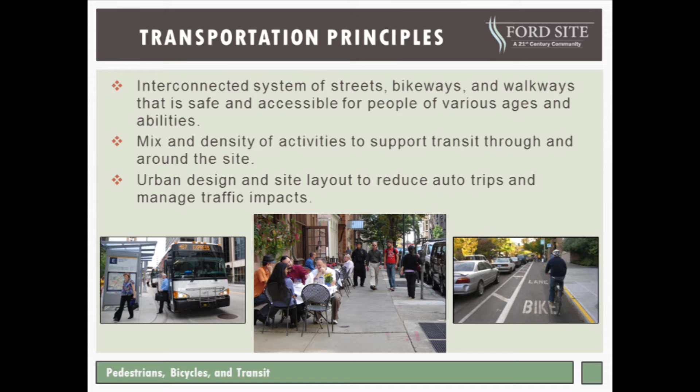So tonight's meeting, we'll start to talk about the role that bicycling, pedestrian, and transit infrastructure plays in helping do that. At the next meeting, we'll talk about it as well when we focus on streets, traffic, and parking. So we aren't discussing cars tonight.

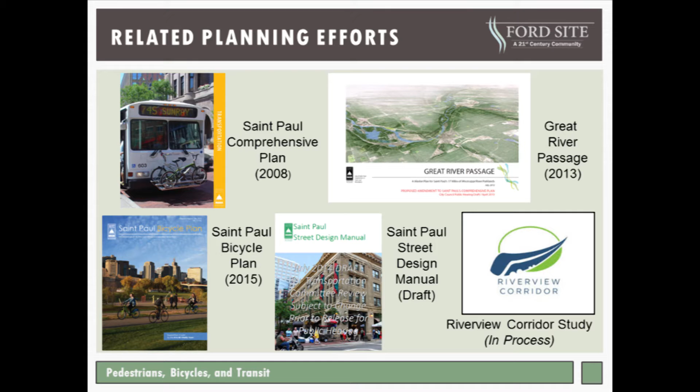There's a table tonight specifically on the Riverview Corridor study that the Ramsey County Regional Rail folks are hosting. It's out in the lobby room, so be sure to stop by and learn about what's happening with the study, since it relates so much to this site.

So where are we in the process of the Ford work? We started in 2007. Some of you might have been with us then, where we put together ideas and key principles. We evaluated them, refined them, and had a number of studies to help us do that.

We're now at the point of having identified some priorities, like our principles, and then questions we have - what do we still need to figure out? At these meetings we're identifying those priorities and asking questions, with your input helping us figure out decisions that will enable us to refine those priorities, and then put together a zoning and public realm plan that would be adopted by the city early next year. That will begin to set the stage for redevelopment, beginning optimistically in 2018.

The purpose of this meeting and our other topic meetings is to share information, give background on the topic, identify often difficult choices and trade-offs we need to make for the site, clarify expectations of what's realistic for us to hope for and achieve, and then get your input on these priorities and questions. We'll use that to refine the priorities, which again will go into the zoning and public realm plan, a way for us to implement those priorities.

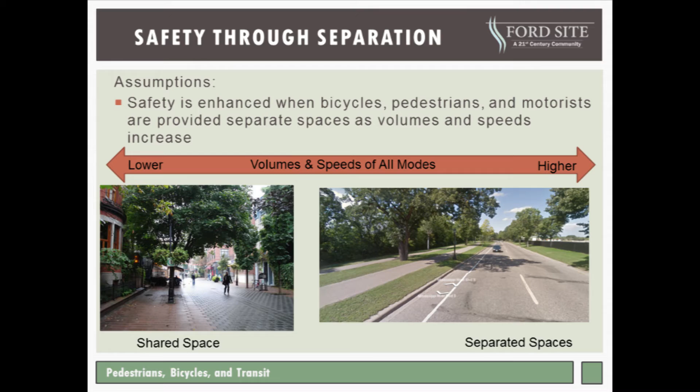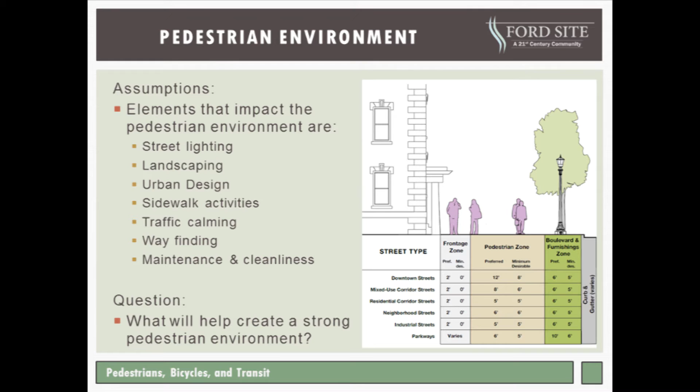This is an example of a typical sidewalk, which we can split into what's called a frontage zone - the area right up against the building, where the friction between pedestrians on the sidewalk and the building causes pedestrians to slow down. This is where you might stop and look through windows and window shop at a local business, or kneel down to tie your shoe. The behavior we often see is that pedestrians will hug up to the building to do something like that.

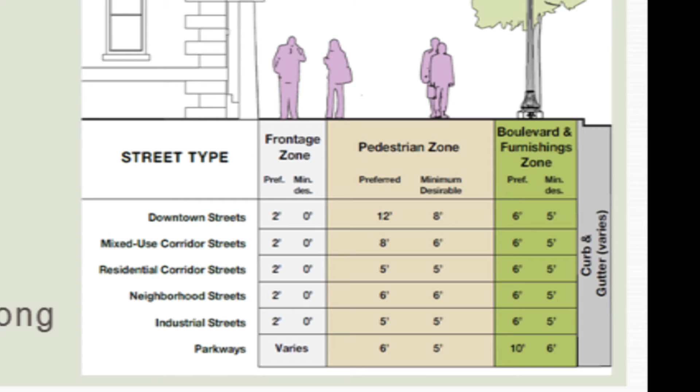Next we have a pedestrian zone, which is where the movement of pedestrians on the sidewalk happens. Then there's a boulevard and furnishing zone where trees, street lights, benches, or other street furniture would go. This is another example of providing separate spaces for separate types of uses so that we can keep sidewalks clear.

An important question we want to ask tonight is, what should the pedestrian environment look like, and what types of uses would we like to see on sidewalks? Should we be prioritizing space for things like sidewalk cafes within the Ford site? What are the characteristics of a sidewalk that will help make it a strong environment?

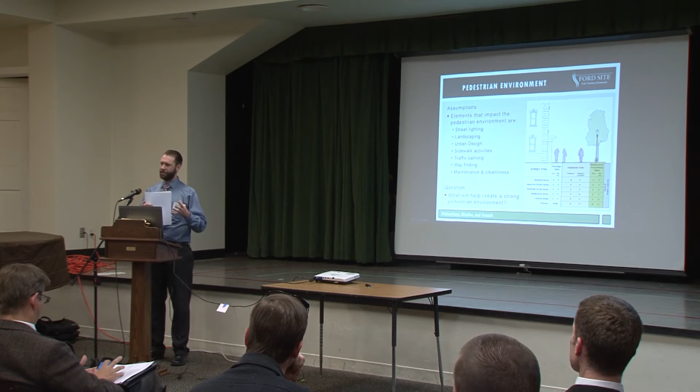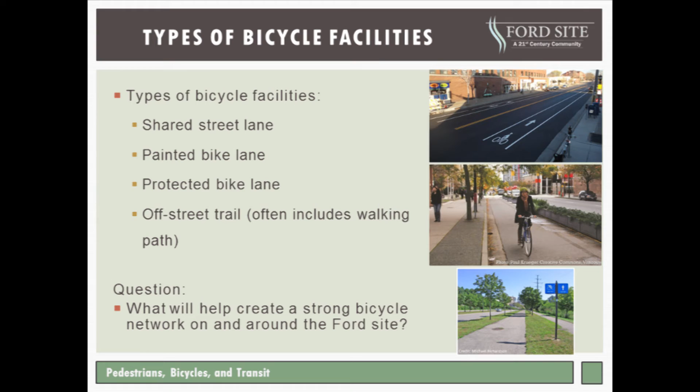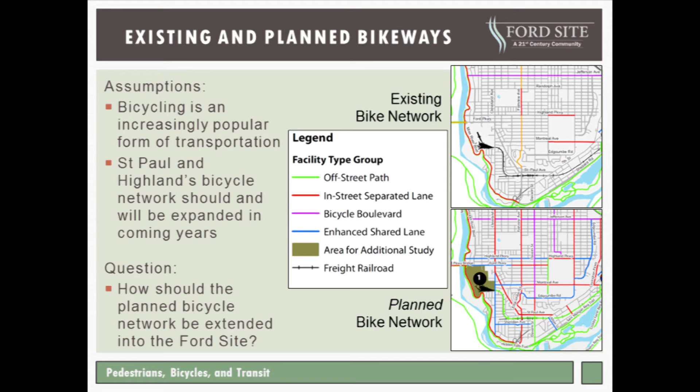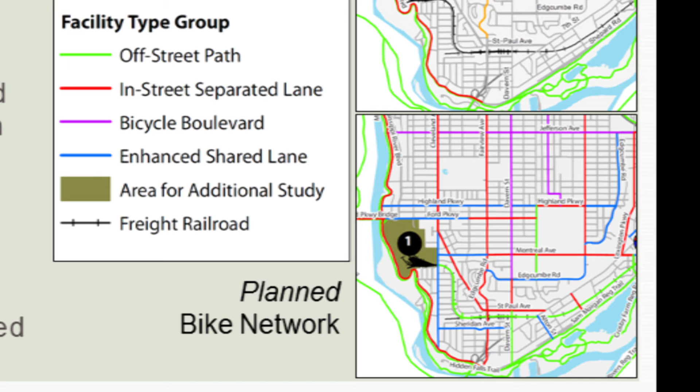Clearly there are a lot more lines on the picture on the bottom, which is the planned network. This is a vision set forth in the St. Paul Bicycle Plan of what bicycle facilities we should expect around the Ford site. The bicycle plan doesn't lay out a network of facilities within the Ford site itself - it identifies the Ford site as an area for additional study, and that additional study is happening now.

The bicycle plan gives us some indication of how people riding bicycles may be approaching or getting to the Ford site. The question for us tonight is how should those bikeways be extended into and throughout the Ford site? How will people get around the Ford site on a bicycle?

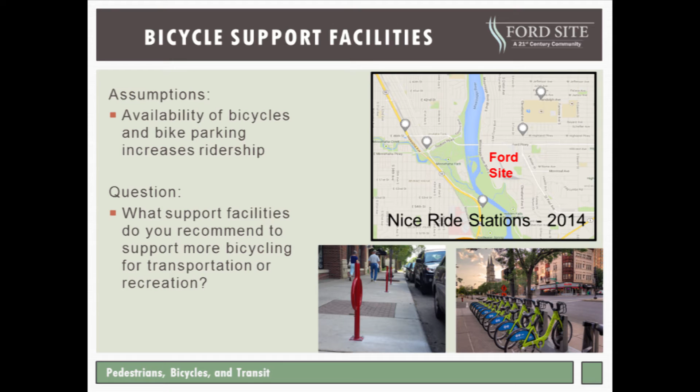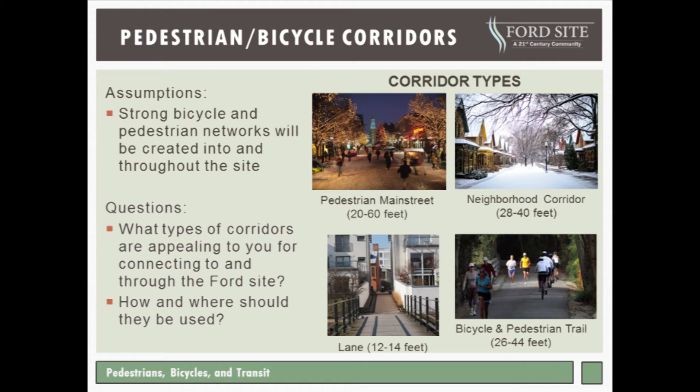One of the goals for the site is a very strong pedestrian and bicycle network throughout. So what types of these corridors should we develop throughout the Ford site, and where should they be developed? How should this network of bicycle or pedestrian only corridors complement the network of roadways we will build throughout the site? How will they interact? Where will they cross or intersect? Each corridor type has various characteristics and space requirements associated with it.

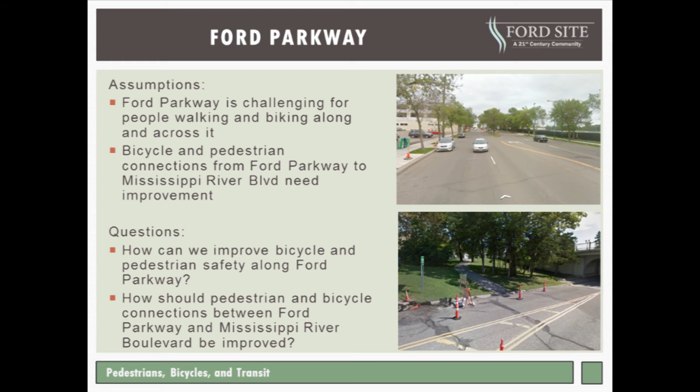So the question is how should we improve them? What does an improvement look like? We could replace it more or less in kind with what's there, or we could do something different - what would that look like? There are some bottlenecks along Mississippi River Boulevard for bicycles and pedestrians. I mentioned earlier that separation of bicycles and pedestrians is really important to ensure pedestrian safety on these trails, where bicycles go a lot faster than pedestrians.

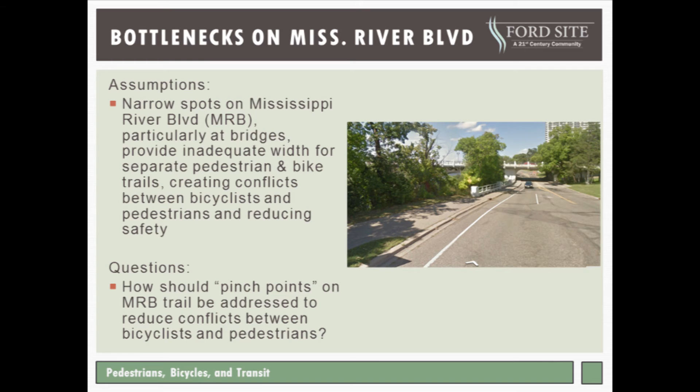In some places along Mississippi River Boulevard, we have separate pedestrian and bicycle paths, and in some places we don't. This is a picture looking north at the Ford Parkway Bridge, where Mississippi River Boulevard goes under the bridge, which is one of these bottlenecks. What should be a wide trail or separate trails for bicycles and pedestrians all gets necked down to about 6 or 7 feet of sidewalk space, and it is a bottleneck.

So there are these pinch points along the corridor, and what should we do about that? How can we encourage safety where a bridge or a bottleneck exists that we may not be able to fix on any sort of short time frame?

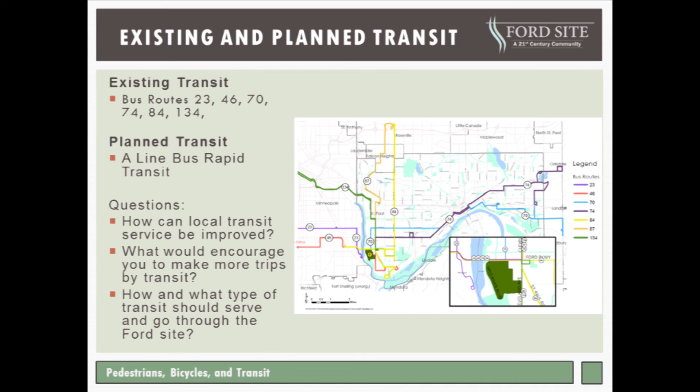Highland already has a lot of transit lines that come through, and the A-line bus rapid transit is a great new opportunity. It's the region's first arterial bus rapid transit, an enhanced limited stop bus service that'll be serving Snelling and Ford Parkway. Another opportunity going on right now, as you've heard from others up here, is the Riverview Corridor Study, led by Ramsey County Regional Rail Authority.

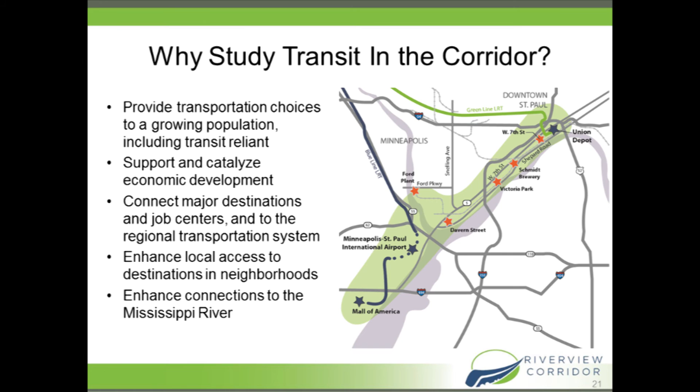They're out in the other room, as was mentioned. They're looking at all modes of transit in any alignment connecting downtown St. Paul to potentially the Ford site, to the airport and Mall of America area, all along West 7th Shepard Road in this map.

That study is going on right now, and it's really the beginning phase of planning for a high capacity transitway through St. Paul. This project won't be complete for many years, so it's a great opportunity to be part of the early phases of planning. They're out in the other room, as I mentioned - that's Mike and Tim.

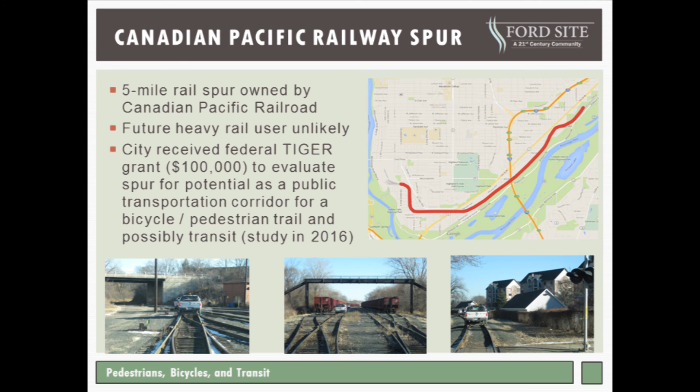Lastly, there's another opportunity happening right now with the Canadian Pacific Rail Spur, which used to serve the Ford factory, but planning so far has indicated that future heavy rail use is unlikely. So the city is planning to study the potential for both transit and non-motorized uses - pedestrians and bicycles - along that spur. That study will begin next year. There are also boards out here so you can tell us what you think about the CP Rail Spur.

That study will specifically look at potential ways to co-locate transit and non-motorized transportation. With that, I'll turn it over to Merritt to wrap up.

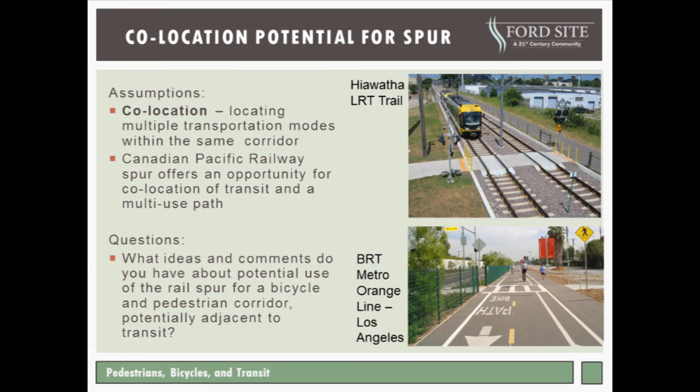Thank you, Michelle. So it looked like a bunch of you had already jumped into the topic tables before we got seated here. They should be pretty self-explanatory - these are the topic tables we have tonight. There are 10 different subjects and tables, so you can pick one room or the other, as Kyle mentioned, and move among the tables at your own pace. You don't have to stay here till 8:30 - we haven't locked the doors. As soon as you've hit the different tables and provided the input or learned what you'd like, you're free to head out.